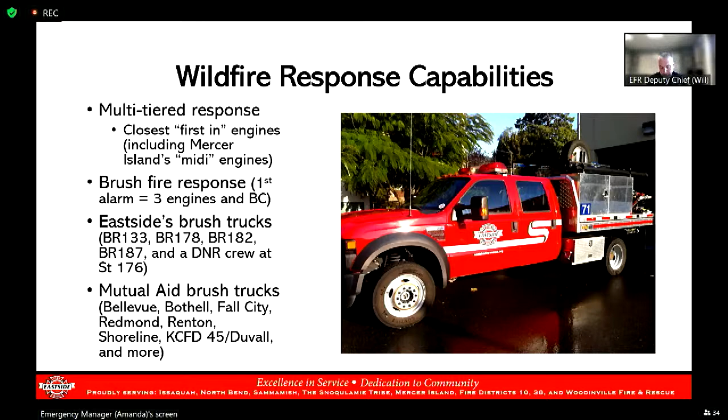There's also been recognition up here in the Northeast County that we need to be better prepared to support each other, meaning that Bellevue has now added a brush truck to their fleet. Renton added a second one a year ago. Shoreline's added one. So there's other jurisdictions up here that are getting into this work because they recognize that urban interface, we have to be prepared. Next slide, please.

So staffing. All of our firefighters, they start from the end of academy. They go through a red card training program to get them that baseline understanding of what it takes to go and approach these. Because again, these are different than looking at a house that's on fire or a car that's on fire. The idea is to surround it as quickly as possible. What we call cold trail, so remove any burning material as quickly as possible, so the fire then cannot continue to progress. And we have to be very efficient with our water because we're working in many areas that do not have sustainable water systems.

Part of our team, we also have 50 people that go above and beyond. So our basic level training allows folks to get out there and handle our day-to-day activities when it comes to wildland. These additional 50 plus folks, and our team continues to expand, they go and get DNR certified red card. And really the difference between the two is there's an arduous pack test that these 50 folks take to make sure that they meet the Washington State DNR requirements.

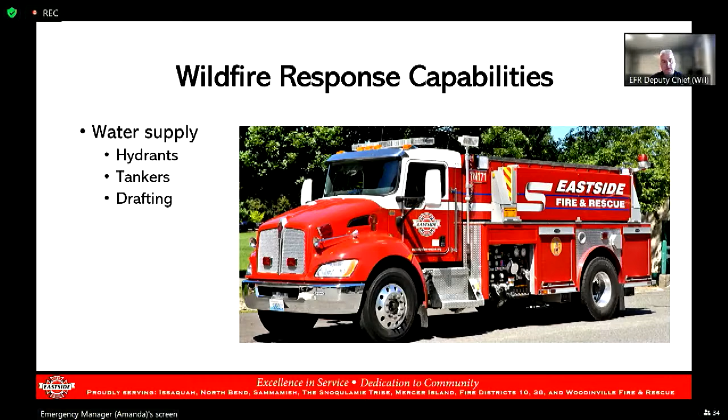One of the great things about how Mercer Island is structured is you have a lot of fire hydrants. Our fire hydrant separation is anywhere from 400 to about 500 feet apart. And while that may seem like a lot, each of our fire engines, our big engines, they carry a little over 1,000 feet of hose. So we have plenty of hose to be able to make those connections and have adequate water supply.

Our tenders also have the ability, so worst case scenarios, say a hydrant system goes down, we have the ability to draft directly out of Lake Washington to provide a continuous water supply to wherever we need it to go. There's also other aspects or resources that we have the ability to tap into. There are some aerial aircraft that we are able to utilize. King County literally last year just bought its first water bucket. It's about 300, 400 gallons. And they're based out of the Renton Field, so they're super close.

But if we start getting into more of the large scale aircraft or larger helicopters, those are Department of Natural Resources assets, and that requires going through a little bit lengthier process, meaning the incident commanders have the ability to evaluate what the needs of the incident are. If they deem that they need some of these aerial resources, because for whatever reason we're unable to resolve it with our ground forces, they can call those in. But if it has not escalated to the size and scope where a state mobilization is activated, the local jurisdiction then carries the burden of the cost of that aircraft.

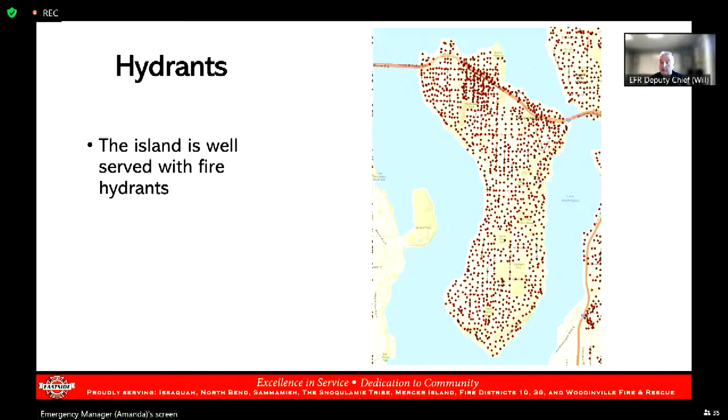In fact, we've got 2 big training events coming up next month, and it's all about working with our partners. We got DNR that's coming out, and several of the cities that have wildland programs are going to be participating in that as well. So that's a quick overview on our response capabilities. So I'll turn it over to Greg.

Thanks, Chief. Yes, the next slide, there's a lot of information here. The yellow areas are what we call intermix areas, where structures and wildland vegetation are intermixed. It's hard to see, but there's also some small red dots. Those are where some sort of brush fire has occurred, and those can be pretty small. And you'll see about a quarter of those are on the I-90 corridor, because so often those co-locate with human activity. Next slide.

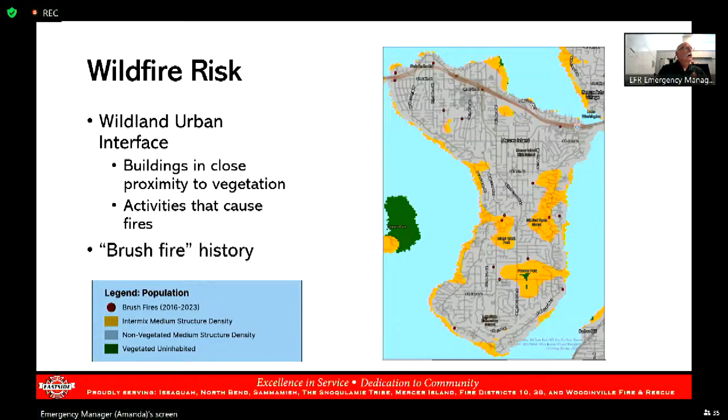So this slide shows what we call a cumulative wildfire risk. It's based on a national data set. It's looking at the probability of ignition should a wildfire be in close proximity. And this is looking out over 30 years, so a little bit like compounding interest. This takes into account geography, vegetation, climate, and fire behavior. So the light yellow color that you see is the less than 0.1%. And so you see you do have some small areas of that on Mercer Island. Next slide.

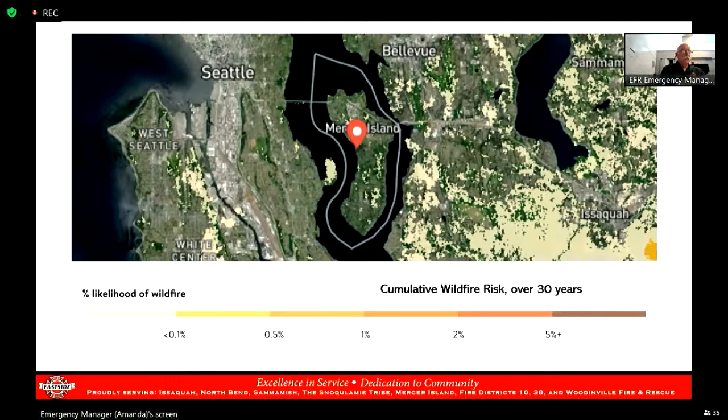So wildfire on the west side of the Cascades has traditionally been very small, 80 acres versus thousands, slow moving, typically away from people. In remote areas, usually the DNR will allow them to smolder until there's a risk to people. Obviously, we've seen some outliers in that behavior: Sumner Grade in 2020 and Bolt Creek in 2022. And I'll talk a little bit more of those in a minute. Next slide.

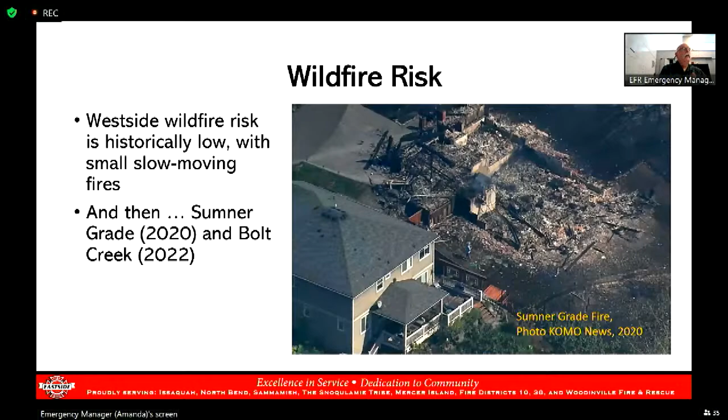So Mercer Island has a lower wildfire risk than some of the recent high profile fires that we've been hearing about. Bolt Creek and Sumner Grade, those are both Cascade Gaps. They were affected by funneled east winds. And unlike Mercer Island, they were away from the moderating influence of Puget Sound and Lake Washington. So you can have temperature extremes in the foothills that you don't have closer to water.

And I know Lahaina got a lot of people's attention. A big difference there, Lahaina, you had quite literally hurricane force winds, downslope, accelerated because of the terrain. You had invasive vegetation that had dried out on the inactive or abandoned plantations. You had vegetation in close proximity to houses. There was a fire code that prohibited that, but there was no enforcement. You had homes close together with an older building code. So a number of things set Lahaina apart from our west side fires.

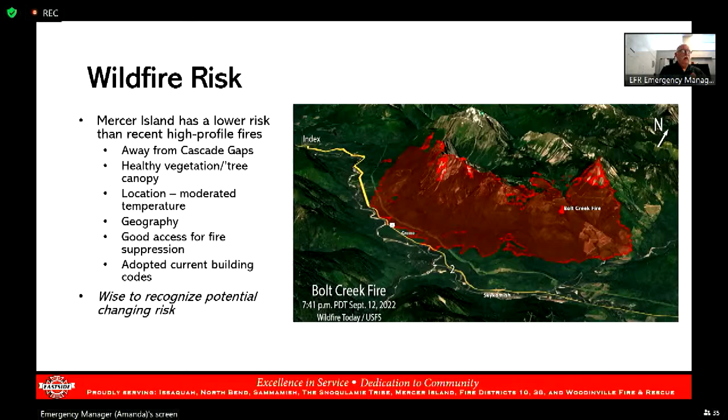Next slide, please. So how do you fix this? How do you address wildfire risk? It's hard to point to any one particular thing. It's really a process, and it really should be a community process. In your favor, you have healthy forests. We have distinctly different vegetation and climate from Eastern Washington. The city of Mercer Island has adopted modern current building codes. You have hydrants, good access, you have all those things working for you.

But as a community, you look at how you measure your risk tolerance, your building code, your wildland intermix, and then you work as a community to decide where you want to focus your efforts. Resources you have available to you, King Conservation District and King County Office of Emergency Management are doing work in this area. Eastside works very closely with King Conservation District.

Also, regarding risk, someone had asked if Puget Sound Energy has a program for shutting off the power during high wind events. They definitely do. However, their modeling shows the highest risk to be in those Cascade Gap areas, and much less so closer to Puget Sound. Next slide.

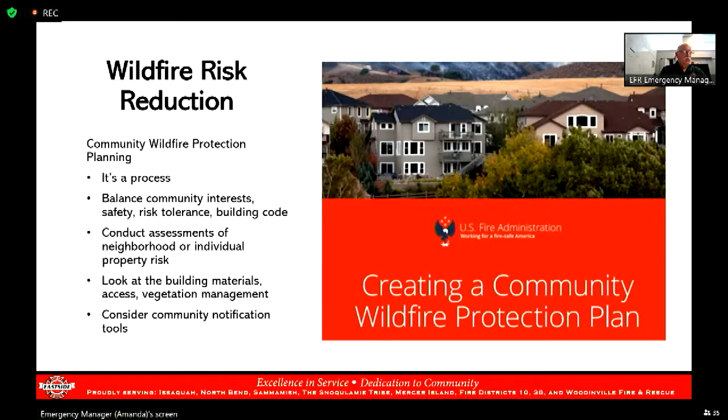There's a lot going on in this slide. Amanda, can you click it 2 more times? Yeah, okay. Oh, well, I'm sorry, go back one, I miscounted.

What we are looking at in terms of risk is obviously the natural environment, weather, temperatures, wind, humidity, vegetation, our built environment, what we've created, building access, building materials, available water, and then our interaction with that environment. Do we allow open fires, fireworks, barbecues, other ignition sources? So those are some of the factors. Next slide.

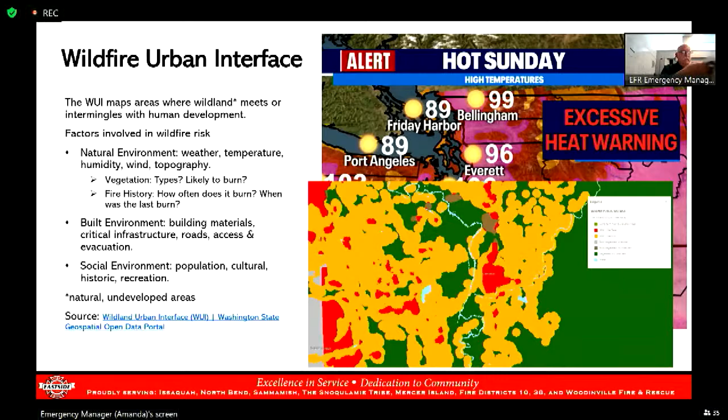Home hardening is obviously an important part of this. On the west side of the mountains, we look a lot at debris on roofs and decks, needles, leaves, similar, vegetation right up against your home, screening on the venting, the bird block venting you have under the eaves, ridge vents. There's a move to go to finer mesh to keep embers out. We look at ladder fuels. Healthy conifer trees on the west side seem to be more of a deterrent to widely spreading fire. So quite a bit different from what we see in California or Eastern Washington. Next slide.

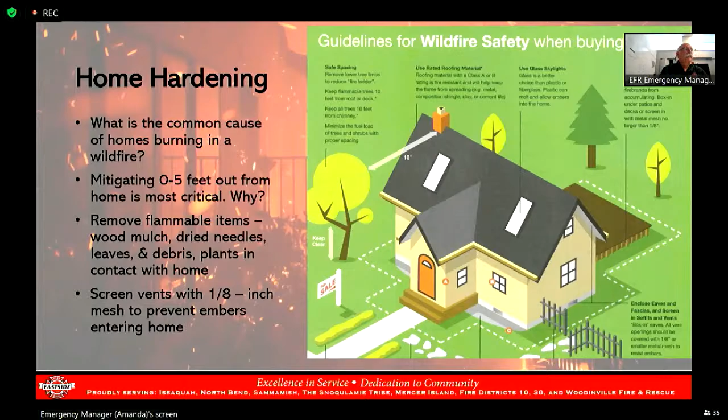So the house on the right, this is the Lahaina Miracle House. According to the owners, the house is wood. It's 100 years old. What they had going for them is they had just replaced an asphalt shingle roof with a modern heavy gauge metal roof. They had trimmed back the foliage around the house, and under the eaves, right up against the foundation, they put down crushed rock. The vegetation trimming and the crushed rock were actually not for fire protection, it was to keep termites out. But those three factors are considered to have made the biggest difference in protecting their home from fire.

So I just threw a whole bunch of information at you. I know you'd seen some of this in your council packet. Amanda, I'll hand it to you. Thank you. Well, we appreciate that thorough presentation. And council, I'll open it up to questions. Does anybody have any questions for the Eastside Fire team?

You may have stumped the group there.

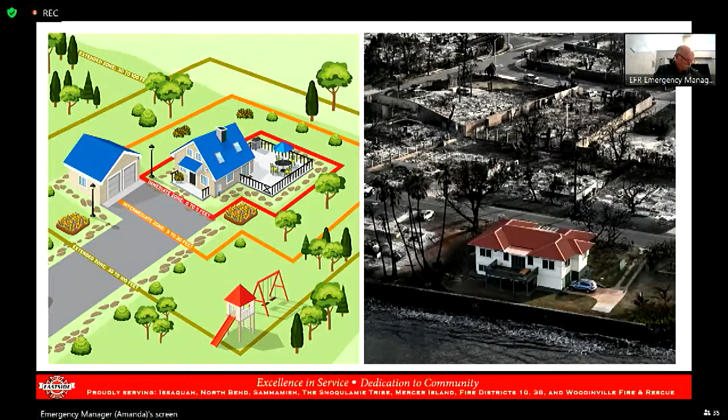Well, look, we in Mercer Island, as we have gotten to know EFR and now gotten to engage EFR, we really appreciate the thorough and hard work that has gone into a lot of these types of materials. I know that the Pioneer Park fire plan was prepared by you folks, and it's great to have you back to talk about urban forest firefighting and what that would look like in the event something happened. We feel quite well protected, so thank you for coming tonight.

Thank you. All right, next up on our agenda, we have the City Manager's Report, and we welcome City Manager Jessi Bon. Good evening, Mr. Mayor and members of the council. Casey is helping me with the screen share. Let's go ahead to the next slide, please.

First up on our agenda tonight is just a look ahead at the upcoming meeting calendar. City Council, I'll remind you that your next council meeting is Tuesday, May 7th. We have a very busy week with board and commission meetings. Both the Arts Council and the Planning Commission are meeting this week. And then the Parks and Recreation Commission and the Open Space Conservancy Trust will be meeting Thursday in another joint meeting and continuing their work on the draft open space zone. They may also hold one more follow-up meeting on May 2nd. That will be determined based on the outcomes of Thursday's meeting.

Also a reminder, we are underway with board and commission recruitment. Our city clerk is going to send you an email tomorrow, council, with the specifics on the design commission seats we need to fill. We realized today that we may have overlooked that specific communication. There are specialist seats that we need to fill, so we'll make sure we get that to you. So far, I think we have enough applicants for all of the seats, but we certainly would like to have more, and we'll keep our recruitment open through April 26th. We'll be in front of you in May to make those appointments.

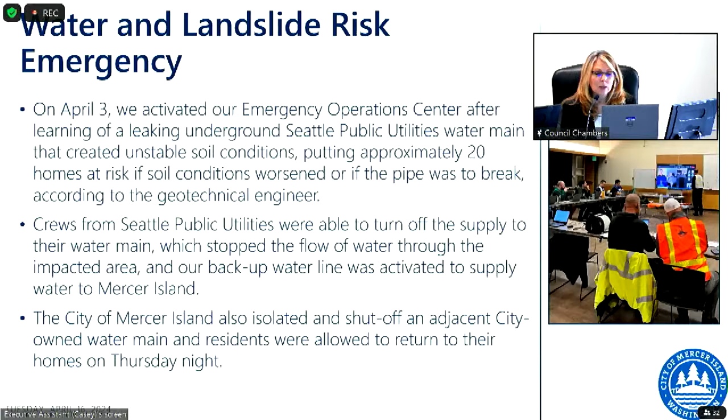In fact, next slide, please. That's the work that's happening now. I guess before I get to that, I should mention the Shorewood community receives their water directly from Seattle Public Utilities. So with the main transmission line down at this time, Shorewood is tied into the city water system, and we are getting our water through a backup line. That backup line is a little bit smaller than the main transmission line, so we are evaluating our water needs as we move into a higher demand season, and obviously eager to get the SPU main transmission line back into service. So what's happening now, more information to come, I think, is the punchline for tonight.

Seattle Public Utilities and their engineering teams and all their technicians are evaluating the repair options. We've been meeting with them pretty much daily since this event happened and evaluating the options.

We also are assessing some work that we may need to do in the area to our own water main. So that's all happening now. We'll be meeting with the neighborhood ahead of any work being started out there, and council will have more information for you at a future meeting. Again, I want to thank everyone for their help, not only the residents, but the team of staff that responded quickly on that night.

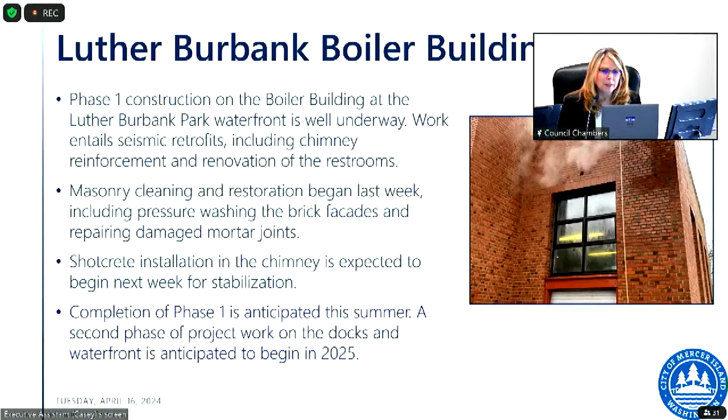This is a heads up. As you know, council, later this year, I think it will be around end of August, early September, work will begin on the sewer line upgrade that happens to run right through the middle of Mercerdale Park. We've had this on the list for quite some time. In fact, our summer concert schedule at Mercerdale was adjusted just a bit to make room for us to get this work done during the fall.

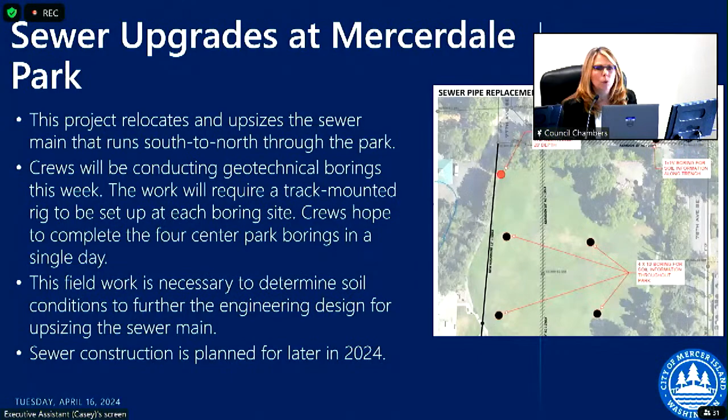So I wanted to let you know that this week we'll have geotechnical engineers out on site at Mercerdale Park taking borings. This is work that just has to be done so we can finish our engineering and design on this project. So we wanted to let you know the work isn't starting yet. It's just the geotechnical work, but it will be highly visible, so we wanted to make sure you're aware. We will be back. In fact, Jason Kintner is sitting right next to me. We'll probably do a quick presentation to you all before we go to bid on this project, just so you know what's in the scope. All right, next slide, please.

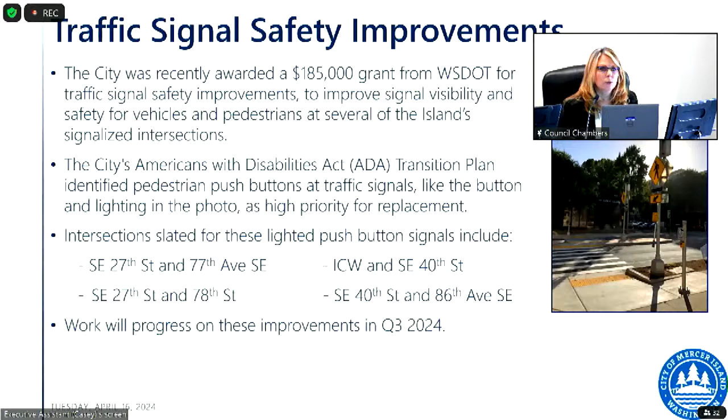Congratulations to our Public Works team. We were recently awarded a $185,000 grant from WSDOT. This is for signalization improvements. You might recall our ADA transition plan identified the need for us to make upgrades at a number of our intersections. So the good news is we've got a grant that will help us do that at 4 locations, and I won't read those on the screen. But what we'll be doing is installing push buttons like what you see there in the picture at those 4 intersections. So we'll be working on that in 2024, and I think some of the work will roll over into 2025 as well. Next slide, please.

Also, I've had a few questions about what's happening on the parcel, the transportation parcel on Island Crest Way, Southeast 40th. We did a pretty big improvement project out there last year, the ADA curb ramps and sidewalks. That's all done. What's remaining is really the landscaping. We had our contractor out last week. They reseeded the grass again and did some work on the irrigation heads and some other landscaping work. So we're just giving that grass a little more time to take hold.

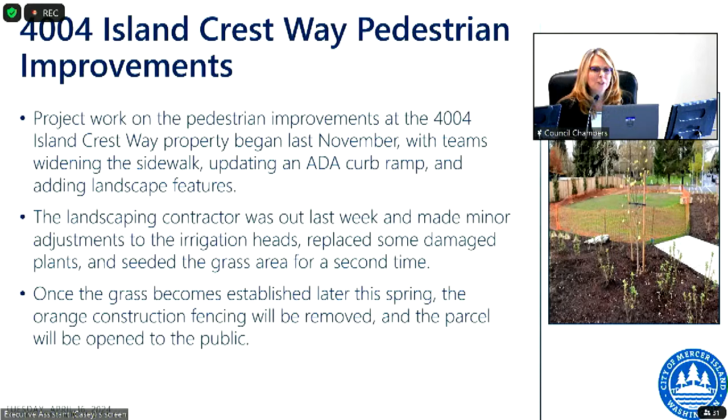As you can see, it looks a little bare still. Once that grass has come in, we will remove that orange construction fencing, and then that parcel will be open to the public. So we're close, probably another 8 weeks or so, if I didn't just jinx it. All right, next slide, please.

The SCADA project, this is our supervisory control and data acquisition system that the city uses to monitor both our water and sewer networks. Council, we just recently completed work on the water side of the SCADA system, and now there's more work to be done on the sewer side. So just a heads up that work is beginning to replace the obsolete sewer system.

SCADA sewer system. So in 2024 and into 2025, we will be upgrading the equipment and SCADA communication systems at 17 of our sewer pump stations. So this is really important work. I was going to say it's exciting work, but it's really important work to help us monitor our utility systems. Okay, next slide.

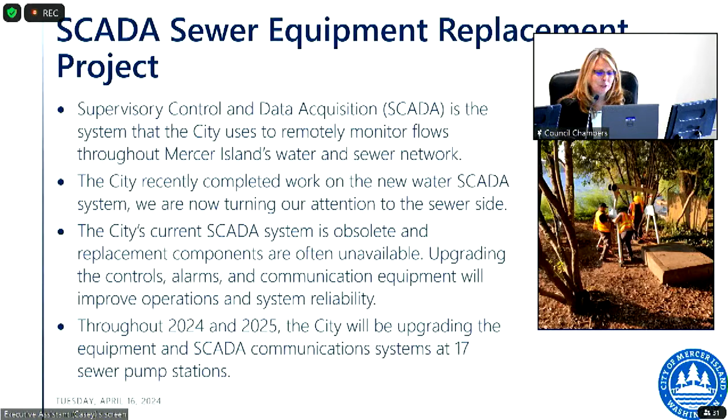A couple heads up items. If you have school-age children like I do, it's that time of year where we need to ask ourselves what will our children be doing this summer? Hopefully not home driving us crazy. So we have just launched our summer camp website, and we're really excited that we have 16 partners delivering camps here under the Parks and Recreation umbrella, some on this site and some at some of our park sites.

Everything from sports to bikes to arts, you name it. We've got something for just about everyone. So we encourage folks to go look at our website and sign up early. Sign up early, lessons learned. These camps do sell out. Thank you. Next slide.

Council, I believe this is on your calendar, but it's a good reminder for everyone. We're hosting a community open house to discuss the comprehensive plan update. That is May 1st, so it's a couple weeks out, from 6 to 8 o'clock here at the Mercer Island Community Center. We'll have our staff and consultants here.

I understand the Planning Commission will be here, and we're looking to engage the community on feedback regarding our comprehensive plan draft, which we are really close to having all pulled together. Thanks to the staff and the Planning Commission for their work on that. Next slide, please.

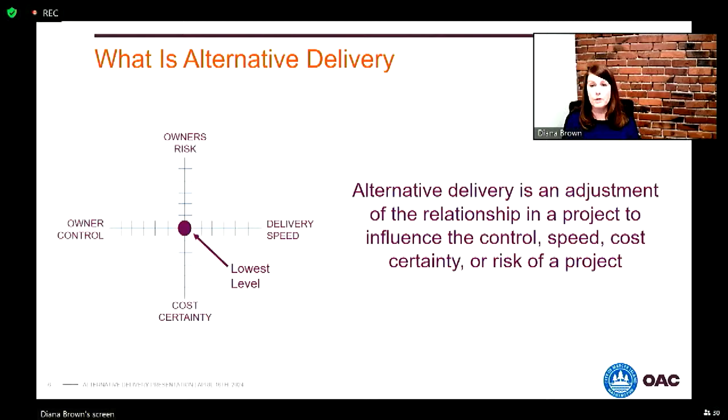So with project delivery methods, we're going to talk about design-bid-build. We're going to talk about general contractor construction management. We will talk about progressive design-build, which is relatively, I don't want to say it's new, but it's relatively new, and it's mostly practiced in this Northwest area. And then we'll talk about traditional design-build.

So design-bid-build. This is the traditional way of delivering a project. This is the tried and true. Everybody uses it. You get two contracts, one with your designer, one with your contractor. The architect-engineer is based on qualifications. You publicly advertise the project and you request for qualifications. That's what our RFQ means. And they are selected.

They go through design. That design is estimated at typically 30, 60, 90% design. You go through value engineering or scope cuts, making sure that you're within budget. There may be constructability review. At this point, there is no contractor involvement in the project. You have your design professionals, your architects and engineers, but no contractors.

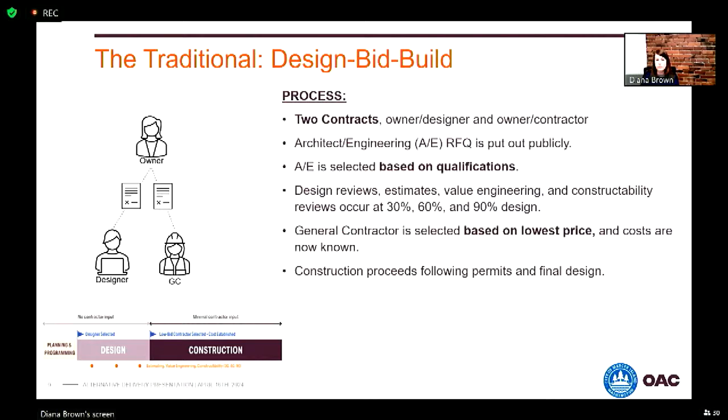At that point, you advertise the project and bids are received and you select the general contractor based on your lowest price. So that is when your cost certainty happens, when you get that price from your contractor. And so construction proceeds through the completion. So this is really the procurement process. You develop design drawings and specifications, advertise for bid. Those bids are sealed and submitted to the city at a certain deadline. You typically have a public bid opening and it's awarded to the lowest bidder.

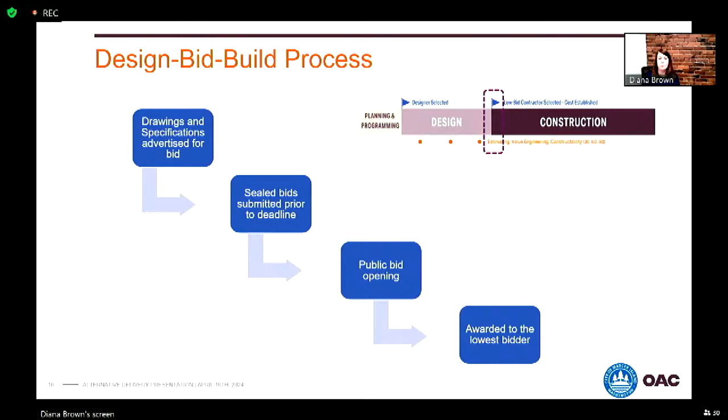So design-bid-build has historically been a pretty tried and true way of delivering a project. It's great for simple projects. And really the idea is that you have the highest amount of risk with design-bid-build because you own all of the errors and omissions in the contract documents, because you have the contract with the architect and engineer. You have a lot of control because you do have that direct relationship with your designer and your engineer.

Your cost certainty as you're moving through the design of the project is pretty low. You end up with estimates based on the documents provided by the architect and engineering firms, but this method is not very fast. It's very linear in nature: you have your design, then you go to advertise, then you go to bid, then you go to construction. So it really is not as quick as some of the other options that we have.

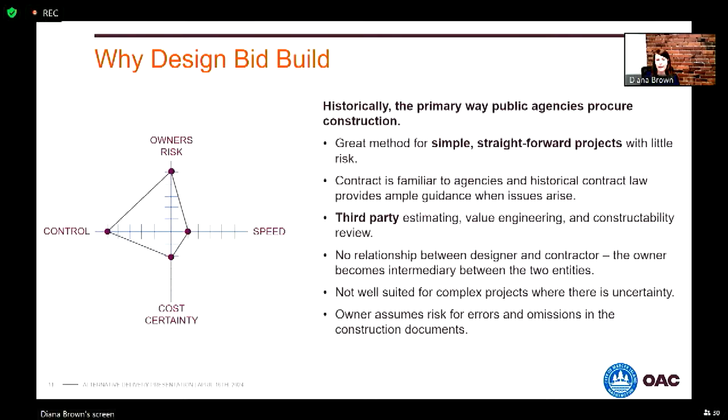Any questions on that? Is everybody familiar with the traditional design-bid-build? Not seeing any questions. Thank you.

Okay, perfect. General contractor construction management, or construction manager. We call it GCCM for short in Washington State. You may also hear it called construction manager at risk, CM at risk. In Oregon, they call it CMGC. We call it GCCM here in Washington. So with GCCM, you still have two contracts. You have an owner-designer contract and an owner-contractor contract.

The architect is still selected on a qualifications basis, and you work with that architect to develop the design. You then select a contractor based on qualifications. There is a cost component, but there is no requirement to select your general contractor based on low bid. It's qualifications and cost. And that contractor is brought on at about 30% design, so this is where you start having contractor input. We like having all parties in the room so that it can affect the design earlier and you can get cost certainty a little bit faster.

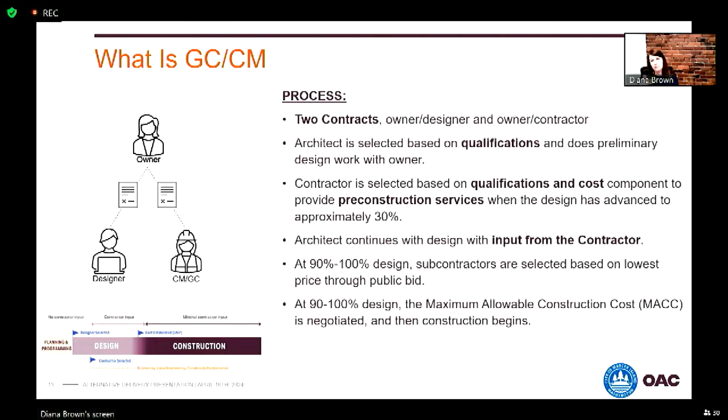But that being said, you do not have subcontractor input at this point. So you just have a general contractor that's on board. You don't have mechanical and electrical subcontractors on board. There are opportunities to bring them on board, but you do have to get approval, and there are some legal regulations that you have to go through in order to do that.

So this is typical procurement of GCCM. This is procurement of your contractor with GCCM. So you go out for an RFQ, request for qualifications, very similar to what you would have for an architect and engineer. You get statement of qualifications, and then you shortlist that contractor. At that point, you will hold interviews and score. And then you get a fee proposal to go along with that.

And the team that is awarded is the team that has the highest score in the end. And that is a combined total of scores between the SOQ scoring, your interview scoring, and your fee scoring.

So GCCM gives you a little lower risk when associated with traditional design build or traditional design bid build. You still own all of the errors and omissions because your contract is with the architect and engineer. The contractor is at the table, which mitigates a lot of those risks, but you still do have a moderate amount of risk. You do have a high control over the design and construction process. It is very collaborative.

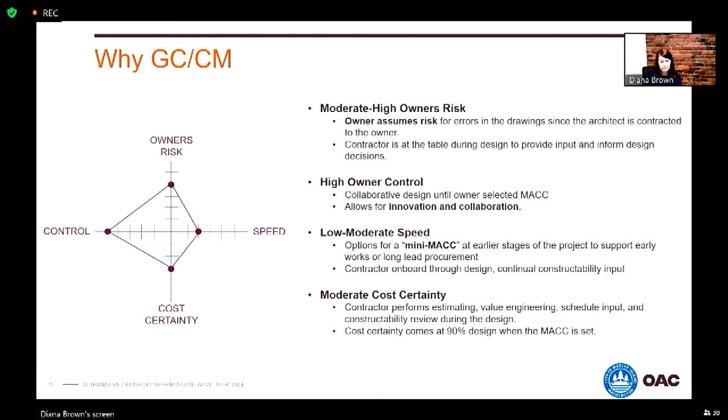All right, so Progressive Design Build. This is, I would say, not necessarily relatively new, but it is the newest of all of the alternate delivery options. So Progressive Design Build, you have one contract, and that one contract is with a contractor and an architect team. Typically, it's with the contractor because the contractor has to provide all of the bonding, and so they have that capability, whereas an architect probably doesn't. And so it's usually with the contractor, and the architect is teamed with that contractor, and it's a single contract.

So that Progressive Design Build process is selection based on qualifications. There is a fee component to it, and we'll get to the procurement of it in the next slide. But the selected team is awarded both the design pre-construction services as well as the construction services.

They work with the owner to develop a program. They go through a validation period, validating your scope, your schedule, and your budget. They talk through design requirements. They refine the cost. You'll hear, if you talk to somebody about Progressive Design Build, target value design, where basically your cost is driving your design instead of your design driving your cost.

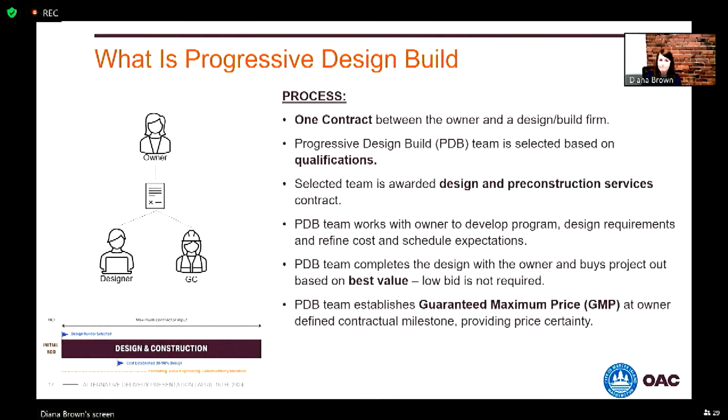Again, this allows for an off-ramp. If you cannot get to a guaranteed maximum price with that contractor, you do have the ability to off-ramp and just stick with your architect team and send this out for a public bid. So from a procurement standpoint, this is very unique; it's basically GCCM with a little bit of a twist, right? So this is an RFP process.

You have that request for qualifications. The interested parties will provide a statement of qualifications identifying their proposed approach and why they are qualified and the best fit for this project. You then shortlist. You score those SOQs and you shortlist, usually to three firms. Then the owner will do interactive meetings and or interviews with those shortlisted firms.

And then we issue them an RFP. That RFP is then submitted after a certain amount of time. That includes a management plan and a fee proposal. So the total scoring of the SOQs, the interviews, the management plan, and the fee proposal allow you to award to the highest scoring team. Again, that team does not have to be the lowest priced team.

And as such, the fee proposal isn't necessarily always weighted very high. There is a requirement for that fee proposal to happen, but we definitely look at progressive design build as being able to hire the most qualified team for your project.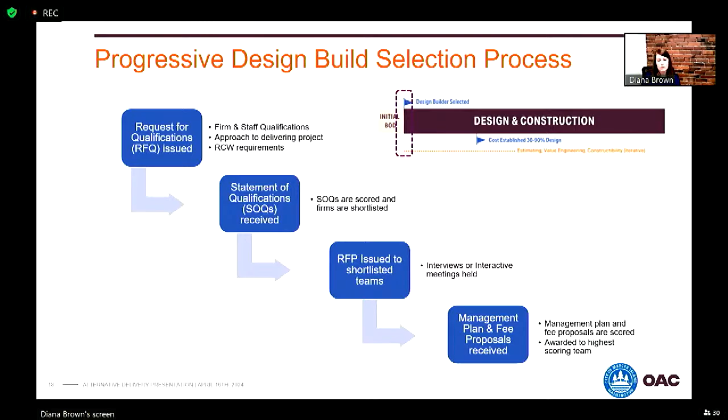So progressive design build is unique in the fact that it lowers your owner's risk. Because you have a contract with the contractor and the architect, the errors and omissions that happen in typical traditional design bid build are not yours to own. They're actually the contractor's to own. And so that errors and omissions, once you sign the GMP, kind of goes away.

What we see with progressive design build is change orders for change in scope and or unforeseen conditions, but we don't see a lot of change orders for missing items. Oh, we forgot to put in a door. So that's a nice lowering of your risk. You do have, I would say, moderate control. You still are collaborating with the design team and the contractor.

It does open up the door to allow the contractor and the design team to work together to come up with innovative solutions for cost challenges that may occur during the process. You can speed up the process using progressive design build. There aren't any regulation requirements to allow them to bring on sub-consultants, so they can bring on their mechanical and electrical subs.

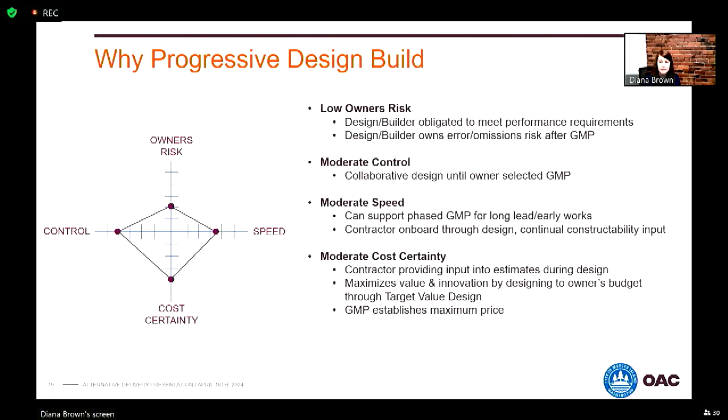All right, any questions on progressive design build? Nope, not seeing any. Thank you.

Okay. And then we have design build. And I will say that the last design build project that was approved through Washington's project review committee was in first quarter of 2022. So we don't use traditional design build as much as we used to. With the introduction of progressive design build, this has kind of shifted out of

popularity, I would say. It is very similar to progressive design build in the fact that your contract is a single contract between the owner and the design build firm. The owner develops performance standards. We typically call these bridging documents that help to support that procurement.

You go out and advertise for the project, and you get qualifications packages from your design build teams. You then will shortlist to a couple of firms, and they will then go through a series of proprietary meetings that provide you with a design. So this is a competitive design process. So you'll get multiple design with cost packages.

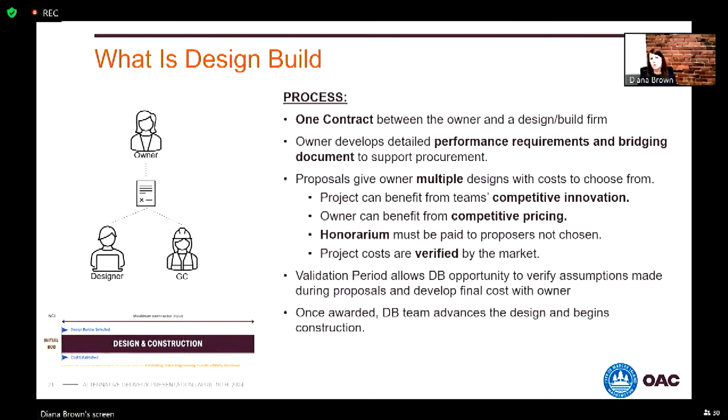So let's go to the next slide here. So you ask for a statement of qualifications, very similar to progressive design build, and you then shortlist. And you can decide how many firms that you want to shortlist with. Of course, we would recommend a minimum of 2. And I have seen a minimum of 2 as far as a shortlisted design build competition.

So those 2 shortlisted firms then move into the RFP process, and that RFP process is, I think, a little more expensive in the fact that you're now having proprietary meetings with 2 firms to get to about a 30% design. I will also argue that we say it's a 30% design, but most design build teams that I have talked to, their design is usually probably more than 30% by the time they submit it to you,

because they do want to make sure that they hit all of the cost certainty that they are comfortable with when they give you that proposal, because that proposal is the design and the GMP number, right? So they want to make sure that they have that GMP, that their cost is right for what they're saying they're going to deliver. Did that answer your question? Yeah. Okay, great.

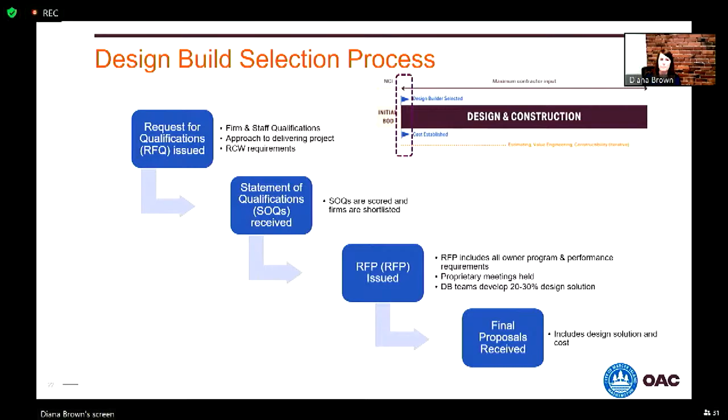Okay, thank you. But yeah, so if your project is $100 million, you could be paying out an honorarium of, what is that, $1 million? To each bidder that's not selected. Yeah. Yeah, it gets kind of spendy. What we see as far as design build is concerned, I would say that if you're looking for high design, if you're looking at a project that is of a significant cost, then design build might be a good solution.

We just don't recommend it as much anymore as we would progressive design build. Got it. For, I think, a couple of reasons. One, it does definitely lower your risk. It gives you a very high cost certainty, but it does, I would say, pull some of that control away from you and brings it kind of more towards the middle of this graph, right? But it does provide you with some pretty good speed on the project.

The fully awarded design that you're getting continues on through the process, getting into design and permitting and all of that kind of stuff. But you get to establish that price fairly soon in the process. Councilmember Anderl, is that a new hand?

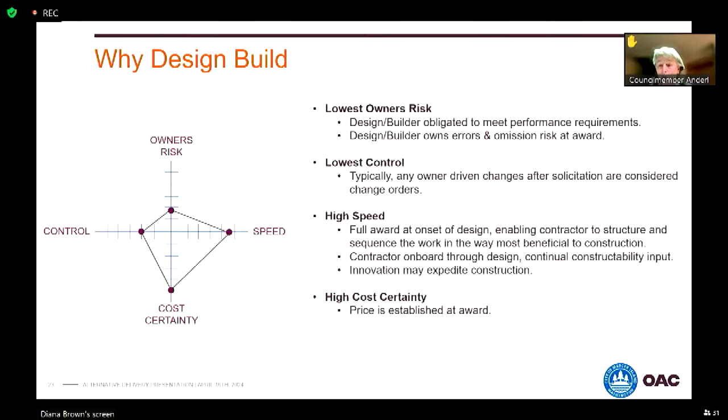It is a new hand. And forgive me, I'm not trying to dumb it down for myself at all, but I can look at these charts side by side. But in some of the other analyses we've had done on other issues, we've had an analysis where things are kind of rated red, yellow, green. So super horrible control is red, super high speed is green, and neutral is yellow. Have you ever done anything like that on something like this, to just show it side by side? I don't want to ask you to do extra work, and I can probably do it myself if I just look at the slides next to each other, but well, look at you.

No, it's fine. Yeah, I think that what we are always trying to do with these alternate deliveries, where if we say the baseline is design, bid, build, what we're really trying to do is pull everything, I guess, to the lower right, where you have more cost certainty and greater speed. We like speed to market because escalation is a real thing. If you haven't noticed in the last 4 years, escalation is crazy. And so speed is always of the essence.

But as you're pulling these things towards that cost certainty and speed, you're giving up certain things, right? I think it's nice to be able to give up that owner's risk. We like not having a lot of risk as an owner, but we also are giving up a little bit of control. And I think that in some ways, if you are an owner that likes a lot of control, then sometimes it's a little bit challenging to give up that control.

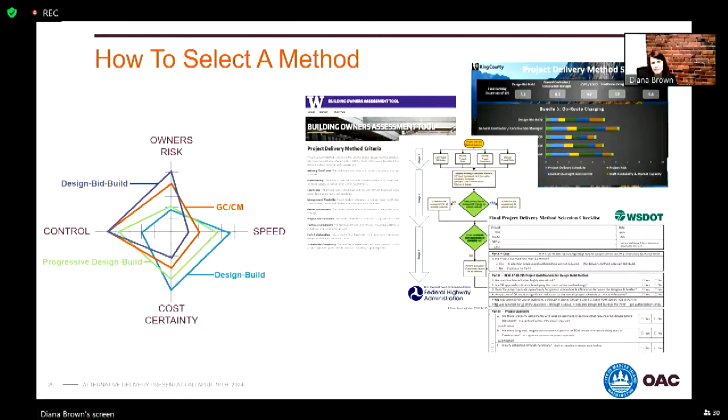All right. So, in any alternate delivery option, the only option that you have that you do not have to go for approval on is design bid build. GCCM, progressive design build, and regular design build require approval.

As a public agency, you have to have a reasonable budget with contingencies totaling not less than 5% of the anticipated contract value. The agency must have staff or consultants with expertise and prior experience on that type of project, comparable projects. The contract documents, so your contract with your GCCM contractor, or your progressive design build contractor, or your design build contractor, has to include underutilized firms such as OMWBE, veteran and small businesses, and your evaluation and approval.

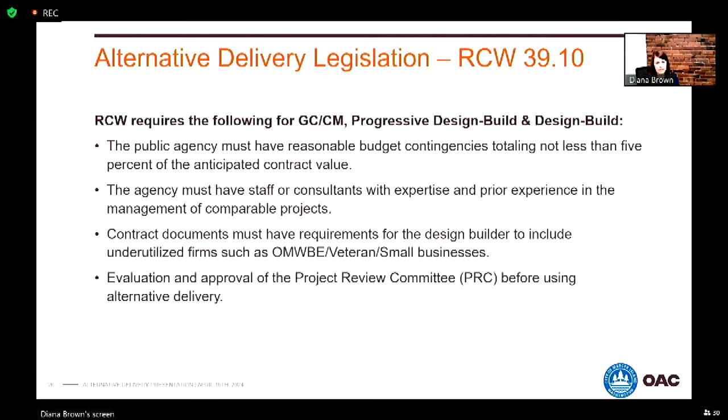You have to have approval from the project review committee. And so with alternate delivery, the project review committee was established by Washington State. It is RCW 39.10. It's a governing body. It's made up of 30 industry professionals. They are labeled the Capital Projects Advisory Review Board. They meet almost every other month, sometimes every month,

regularly. You submit an application about a month before the meeting, and in the meeting you present your project, your qualifications, and they have a discussion in front of you and either approve or deny your application to use some sort of alternate delivery on your project. All right. So that's all I got. Let's have you stop your screen share, Diana.

Thank you. So back to Councilmember Reynolds' question, just to give you an idea of where we are in the process. We are in what's called pre-design right now. We're at the very ground level, literally, looking at site conditions and getting information about the site to inform our design. We have an architect that we hired last year to do a slightly different body of work around long-range facility planning, but we quickly retooled and regrouped, and they are leading that pre-design work for us.

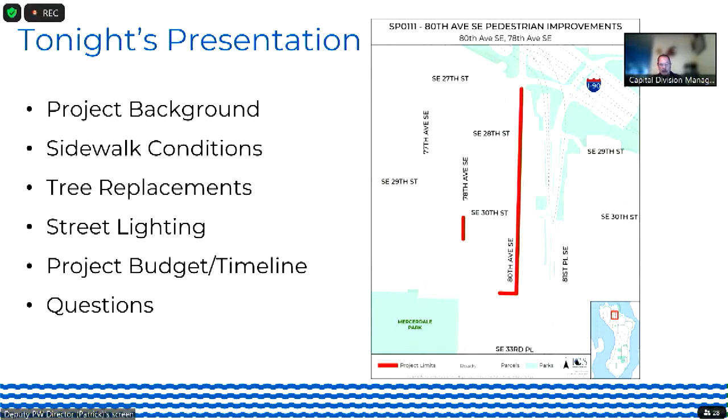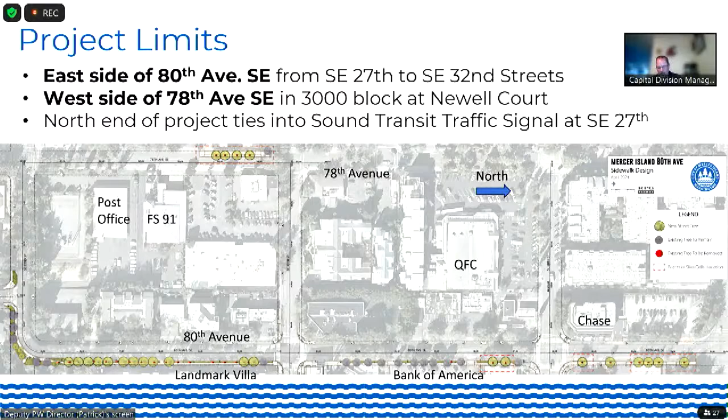The northern boundary of this project is the Southeast 27th Street intersection, and Sound Transit will be constructing a new traffic signal there later this year. Next slide. So a little background on 80th. The curbs and sidewalks and street trees and street lighting, most of that infrastructure dates to the 1970s and into the 1980s. In the mid-90s, when the city undertook a large street reconstruction project that tackled 77th Avenue and 78th Avenue, we did the west side of 80th Avenue, but we did not do the east side. So the east side is still this 40 and 50-year-old infrastructure.

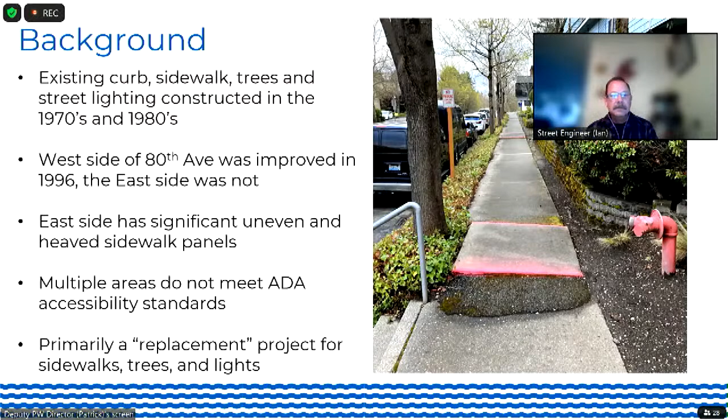Good evening, Council. My name is Ian Powell, and I'm your street engineer. Next slide. Oh, there we go. So I'm going to start off showing you some pictures of the existing sidewalk conditions along 80th. Just want to note we're starting at the south end of the project, so 32nd, and we'll slowly work our way north through these pictures.

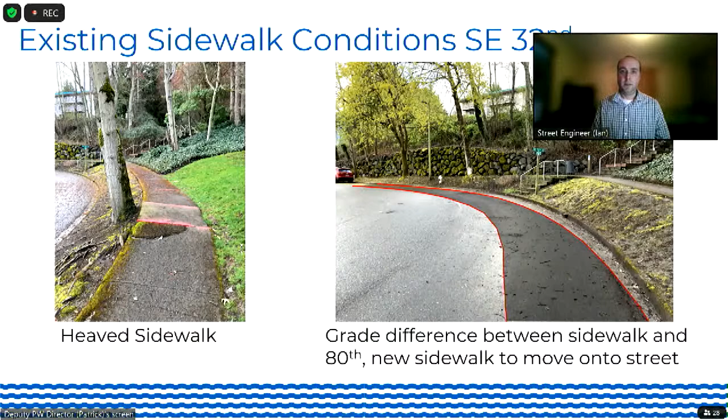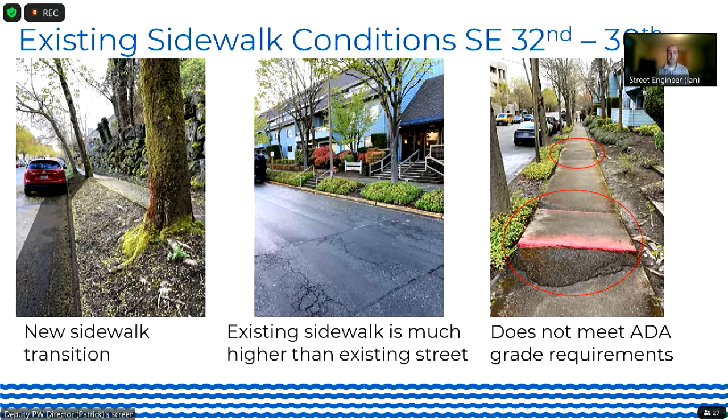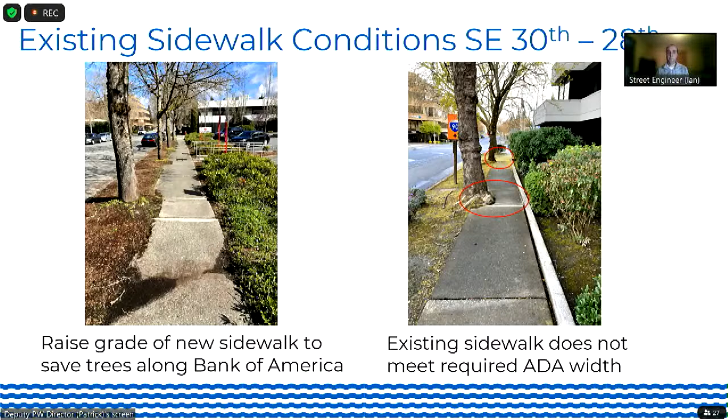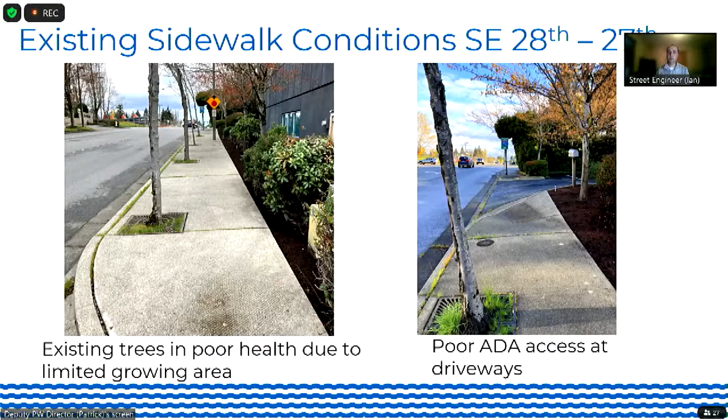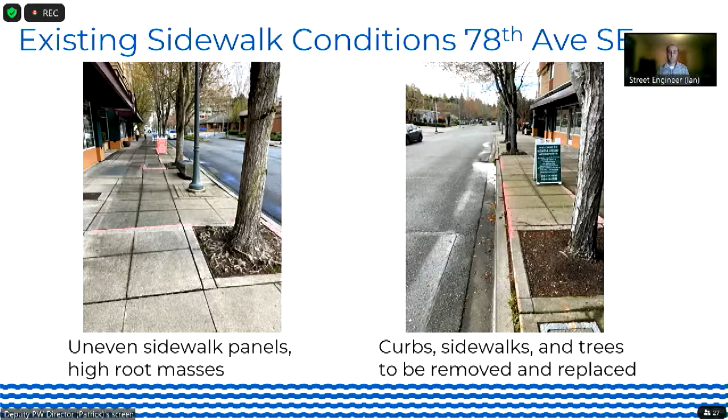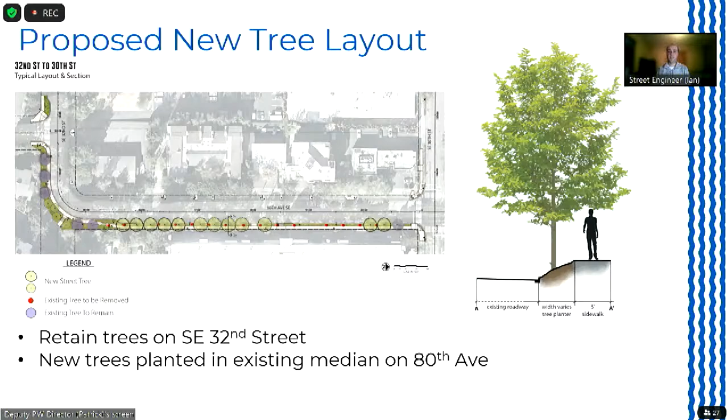And then once you go around the bend and start heading up 80th, all those trees will be removed and replaced, and they'll be planted in the existing tree planter between the curb and the sidewalk. Next slide, please.

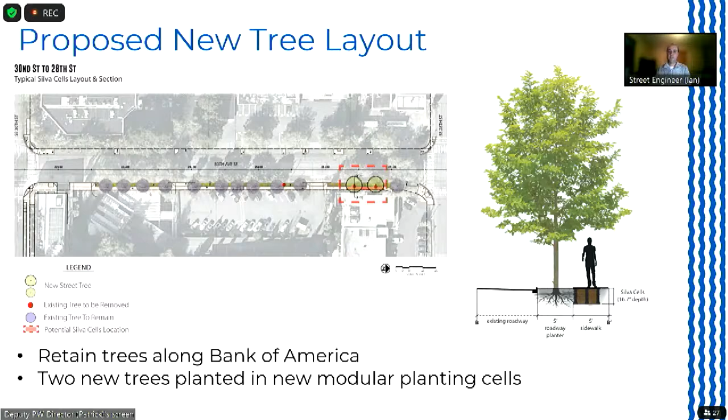So the next block, this is from 30th to 28th in front of Bank of America. And like I mentioned before, we can fit the new sidewalk between those trees and the right-of-way. That's why those trees are grayed out. They are staying, but I also showed those two other trees that need to be removed. They are at the north end of this block, and they will be planted in new modular planting cells, which I will cover in a later slide. Here we'll have a 5-foot roadway planter and a 5-foot sidewalk. Next slide.

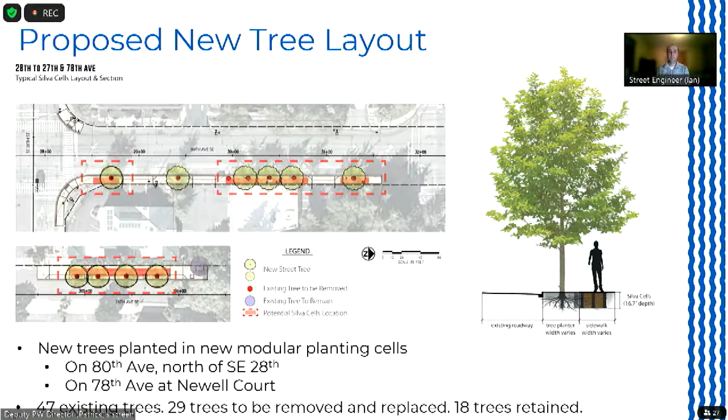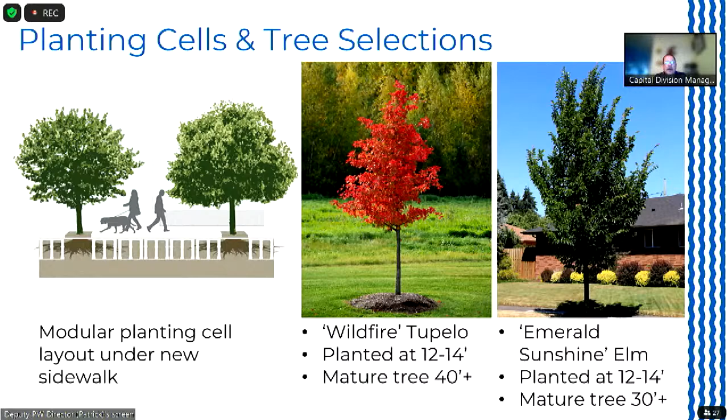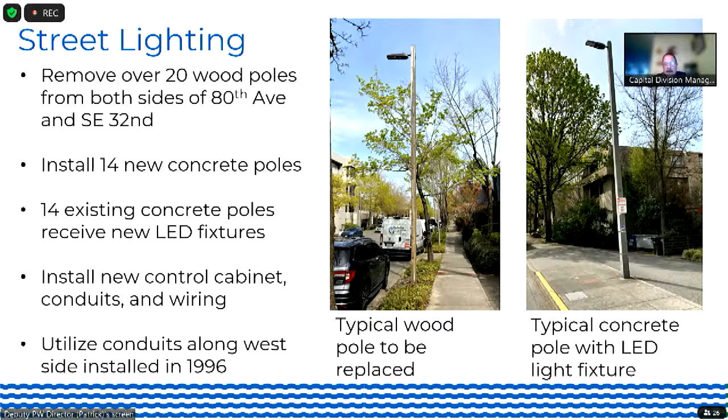Clint, can I quickly ask, the light that was on the wooden pole looked like it had a fixture that matches what's on the concrete pole. Is it already LED out on the wooden poles? I think that our right-of-way team has done an LED retrofit on those wooden poles, but I don't think the new electrical system that the engineers have designed for us is the same voltage as this old system. So I don't know if these LEDs from the wooden poles can be switched over or not. I don't think they can, because I think we've got different voltage systems here. Got it. Thank you. Thank you for that question, though.

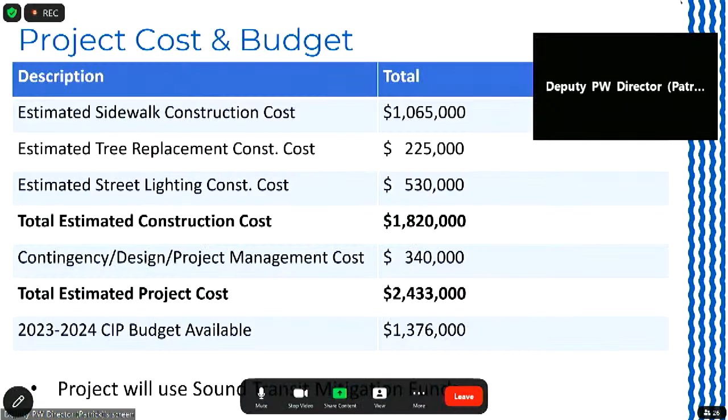Yeah, can we go back to the project cost slide? Sure. The numbers didn't add up in my head. I think I must be missing something. I'm sorry, bear with me for a moment. Sure. Yeah, so the construction cost, so the 1.8 plus 0.34 does not add up to 2.4. Adds up more like to 2.16.

Oh, you're right. We may have a bad number in there for the contingency design project management, because we'd be running a 10% contingency, which would be 180. We may have missed a couple of costs in there. I apologize for that. Okay, well, if you wouldn't mind reconciling that so that we know exactly what we're looking at. I believe we will certainly have a better cost table when we come back to you. Thank you. I apologize for that. I believe the 2.4 number is right, but I think something's haywire there in the contingency design project management number.

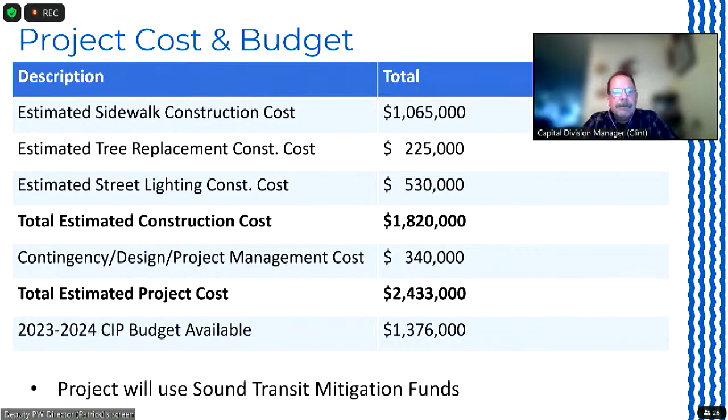Council, it's correct in the agenda bill. It looks like we're missing one of the line items; it is currently on page 3 in your agenda packet, but we'll make sure that when we come back to the council, it's revised correctly in both the agenda bill and the presentation. Very well. Council, any other questions?

Maybe Jason, this is a quick question for you, but when we did the intersection at 77th and Sunset Highway, there was some forethought put into infrastructure that could be replaced at the same time. Is there anything in this corridor that is, from a water, sewer, stormwater perspective, needs to be done that's not getting done? Not to my knowledge. Our team did a thorough evaluation of all the infrastructure in that area, and we lumped in what we could with this project. That's why you're seeing both the lighting as well as the ped improvements here.

But I will say, you mentioned earlier, this does tie into the Sound Transit intersection at 80th and 27th, which includes the lighting and ped access as well. So. Excellent. Patrick, anything else you want to add? Go ahead. All right, looks like that might be it. Last call for questions. Moving on.

All right, thanks Ian, thanks Clint, thanks Jason. Okay, thank you all.

Patrick, appreciate it. All right, our last item of regular business is AB 6454, Reconstitution of the Planning Commission, consideration and amendments to the MICC Chapter 3.46, Ordinance Number 24C-06, first reading, and we welcome CPD Director Jeff Thomas.